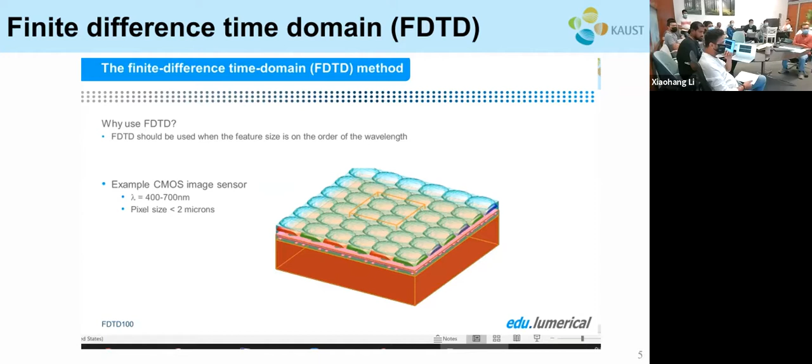FDTD is typically used when the feature size is on the order of the wavelength. This wavelength scale regime, where diffraction, interference, coherence, and other similar effects play a critical role, is called wave optics. When the feature sizes are much larger than the wavelength, other methods, such as ray tracing, are more efficient.

A simple example where we can see the difference between wave optics and ray tracing is this triangular pattern etched in a material with a refractive index of 1.5. This type of structure is commonly used as an efficient reflective coating because light is always incident at 45 degrees to the normal, which is above the critical angle for total internal reflection, and therefore we expect the device to reflect 100% of the incident light.

We can run an FDTD simulation to see what happens for two different wavelengths. In the first, the incident wavelength is 400 nanometers, or 0.4 microns, while the structure is 20 microns in pitch, or period. Since the structure is much larger than the wavelength, we typically would simulate with ray tracing. As we run the FDTD simulation, we can see the result we expect from the ray optics analysis. This is a major advantage of FDTD: we can chase the movement of the wave. Almost all of the light is reflected.

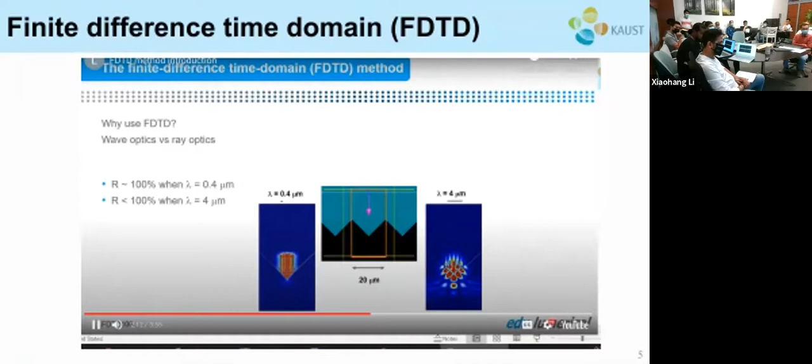The second wavelength we will use is 4 microns, and the structure has the same 20 micron pitch. Now we can see completely different behavior because there is clearly a substantial transmission, and we can even see the penetration of the evanescent field into the air. To correctly solve the second wavelength, we need a method like FDTD.

FDTD is a general and versatile technique that can deal with many types of problems. It can handle arbitrarily complex geometries and makes no assumptions about, for example, the direction of light propagation. It has no approximations other than the finite size mesh and finite size time step. Therefore, it is very accurate. As a time domain method, one simulation can give broadband results. Finally, the FDTD algorithm scales well with parallelization, so it is well suited to modern multi-core and multi-processor computers, as well as high-performance computing HPC clusters.

Because FDTD is so versatile, it can address a wide range of applications. These include photonic crystals, plasmonics, CMOS image sensors, nanoparticle scattering and absorption, nanopattern solar cells, OLEDs and LEDs, gratings, lithography, metamaterials, and integrated optics, to name just a few. You will notice that all of these applications involve wavelength-scale structures.

At the beginning of the simulation, the E and H fields are typically 0. From here we update E at time n plus 1/2, which is a function of E at the previous time step, plus a term proportional to the curl of H at time step n. Once we have the E field updated to time n plus 1/2, we can proceed to update H at time n plus 1, which is a function of H at the previous time step, and the curl of E taken at time step n plus 1/2.

In this way, we can leapfrog the update of E, then H, then E, and so on until we choose to stop the simulation. It is important to understand that we do not ever calculate E and H at the same point in time. They are offset by 1/2 time step. In fact, if you record the E field as a function of time with a monitor and plot it, the monitor will interpolate the original FDTD E fields to the same time step as H, so you may never notice this offset.

Despite this issue, this leapfrog approach has the advantage of allowing us to obtain second-order accuracy in time, which means that the error between the electromagnetic fields calculated by FDTD and the correct solution scales with the time step squared. This means, for example, that if we reduce the time step by a factor of 2, our error diminishes by a factor of 4.

The simulation geometry is discretized into Yee cells, which, as mentioned previously, are the fundamental unit of the FDTD method. The E and H field components are all located at different positions within the Yee cell. This allows us to calculate spatial derivatives by finite differences at the optimal spatial locations and gives us second-order accuracy in space on a uniform mesh. Still, it is important to understand that the E and H components are never known at the same spatial location, which can have consequences for many types of results which we may wish to calculate, such as energy density.

By default, monitors that record these fields will automatically interpolate all field components to the corner of the Yee cell so that you can visualize and analyze your results at the same spatial location. However, this interpolation can be disabled, and this is useful for some advanced calculations, such as determining the optical absorption in a metal near a metal dielectric interface.

In addition to E and H, we must also discretize the electric permittivity, epsilon. In most regions, this is very straightforward because we can assign a permittivity of either material A or material B. However, it gets much more complicated near interfaces because the interface can pass through a Yee cell at any position and orientation, and furthermore, each electric field component is in a different spatial location. As a result, we need a different value for the X, Y, and Z components of the permittivity, even if all materials are isotropic.

This is a key factor that determines the accuracy of the FDTD simulation. As a coarse rule of thumb, you can get initial FDTD results with 6 points per wavelength, and many results such as transmission and reflection will be within 10 or 20% of the correct answer.

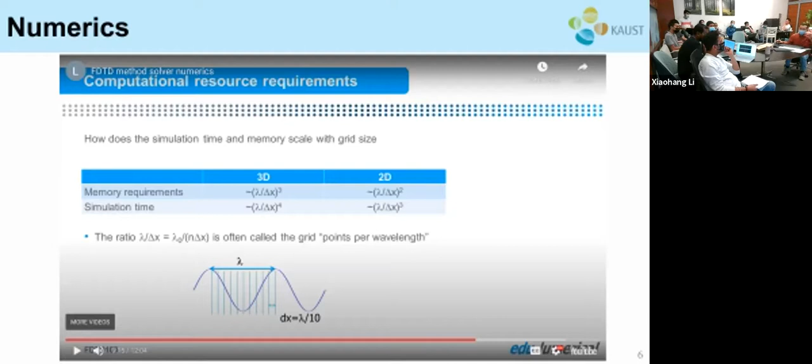Does it mean the simulation time and memory requirement only depend on spatial grid size? Yeah, exactly. Depends on how many grids you have. The more you have... In the space only? Huh? In space only, meaning not time. Also in time. You can define the time step size as well, but usually that's dependent on the speed. Once you discretize the space, the time step is dependent on the speed of light, so it's fixed. So the only independent variable is delta x. Yeah.

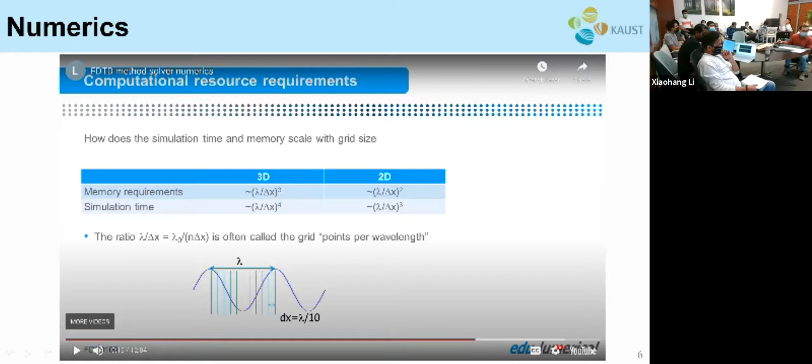Here this value is very important. It's like an empirical value to get good first results: the spatial grid size, dx, equals lambda divided by 10. This is like a rule of thumb when you want to do a calculation. The minimum grid size should be this value.

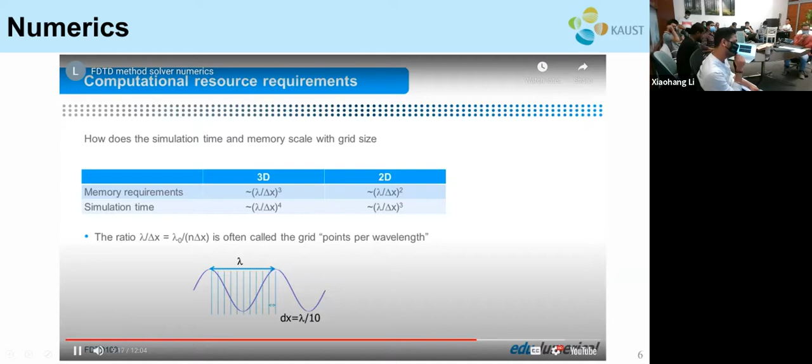With 10 points per wavelength, many results will be within 1 to 2% of the correct result, and it is rare to require more than 20 points per wavelength. I should note that this is a rule of thumb only, and sometimes much smaller meshes are required to resolve geometric features or to correctly simulate plasmonic effects where high light confinement can occur.

It is also important to note that the points per wavelength should be defined with respect to the wavelength in the medium and not the free space wavelength. Therefore, for similar accuracy, a smaller grid size should be used in materials with higher refractive index.

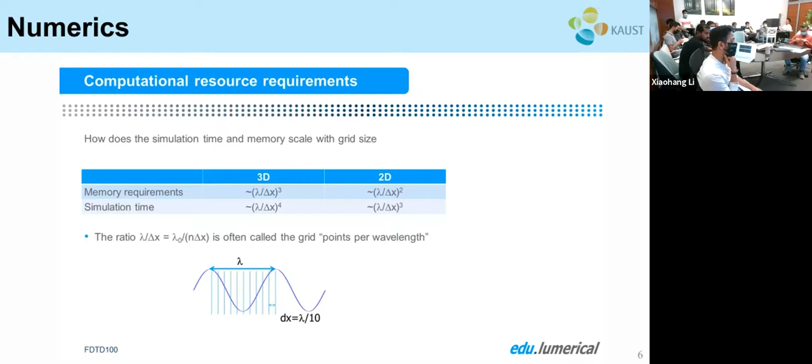Lumerical's FDTD solutions provides a simple mesh accuracy setting that targets a minimum points per wavelength in all regions of the simulation and automatically adapts to the refractive index of the different materials. The mesh accuracy of 1 through 8 corresponds to points per wavelength targets of 6, 10, 14, 18, and so on up to 34. The default value is 2, and this is appropriate for most simulations.

Initially, you may want to even use a setting of 1 until everything else is set up properly. It is rarely useful to use values larger than 3 or 4, as there is typically something else that limits the accuracy of the simulation at that point.

For fine geometric structures, or situations such as plasmonic structures where you know the light confinement will be high, the mesh can be controlled locally using mesh override regions.

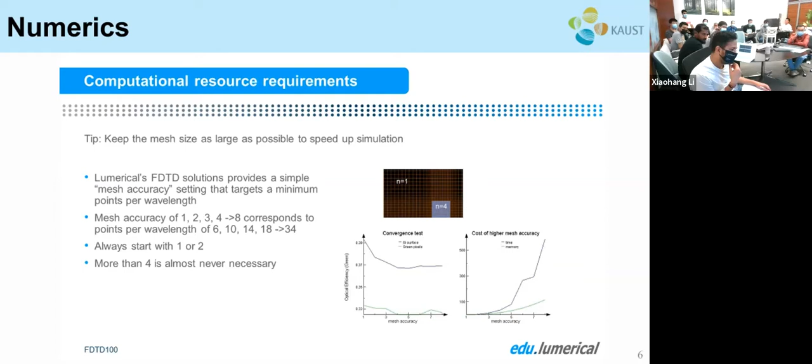In the second figure, you can see the cost in time and memory of the higher mesh accuracy settings, normalized to a mesh accuracy setting of 1. It takes almost 600 times longer to run with a mesh accuracy setting of 8 compared to 1. In this application, where a mesh accuracy setting of 1 can run on a single workstation in a minute or less, this can be the difference between waiting 1 minute and waiting 10 hours for your simulation to complete. Yet the results are almost identical.

Clearly, you want to be working where each simulation takes only 1 minute, which makes it easy to perform complex parameter sweeps and optimization.

Okay, this is the introduction on some of the numerical schemes used in the software. Go to the next page.

Next is an introductory video on the software we are going to use. It's called Lumerical FDTD. It's a very short video that introduces some of the main features of the software.

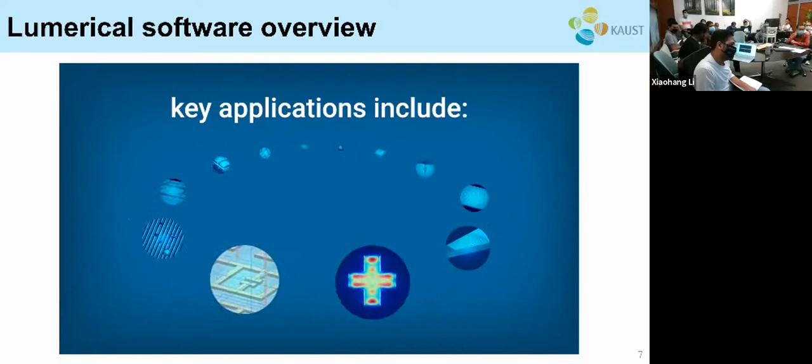LEDs and photodetectors are a main topic in our group, so this software can be used for that as well.

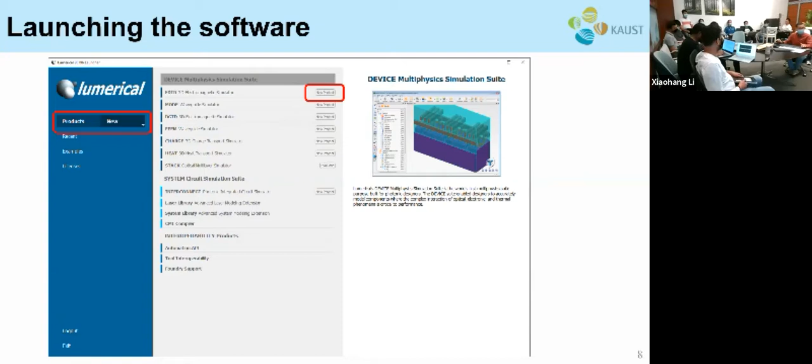Okay, so those are all the background knowledge I want to cover. Next, let's take a look at the software. I think all of you already have the software installed, right? Yeah, okay, so let's open it.

Share screen. So this is the software on my computer. I think it might look a little bit different on yours because the one you installed is a much later version. Mine is the 2019 version, I think yours is the 2021 version.

Can you close the top bar? Might be floating. Originally the company was called Lumerical, but it has been acquired by ANSYS, I think last year. That's why now the software is called ANSYS FDTD, or something.

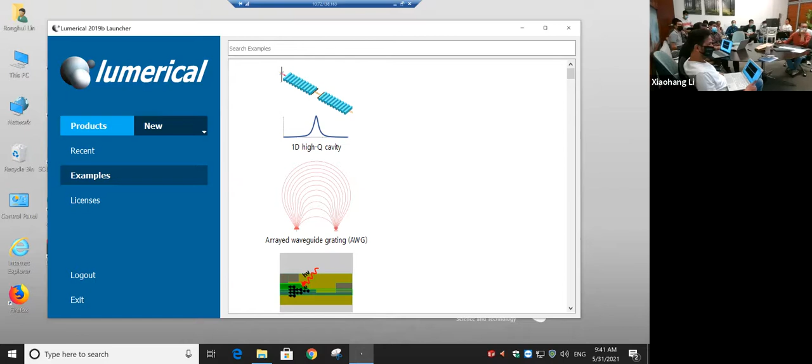We double click to launch the application. On my software, this is what it looks like. I think it looks a little bit different on your computer, but the main idea is the same. I go to the products bar, the menu bar on top, the first one, products. Then at the top there's an entry called FDTD 3D electromagnetic simulator. Here I click on new project, and the FDTD will be launched.

Ours are totally different, yeah, we don't see any of this, like the product inside the solver. Inside the solver, yeah. Oh, that means if you see a screen asking you... it's the third option, right, for Jose? Yeah, if you see that, Jose, can you sit next to Ronghui so that he knows what the latest interface looks like.

I think you have to activate the license on a model and restart the system. I think so, yes. Okay, so request an evaluation? Yeah, and this is the initialization, log in. If you are on the screen asking you to input a license, go to the third option to request a trial license.

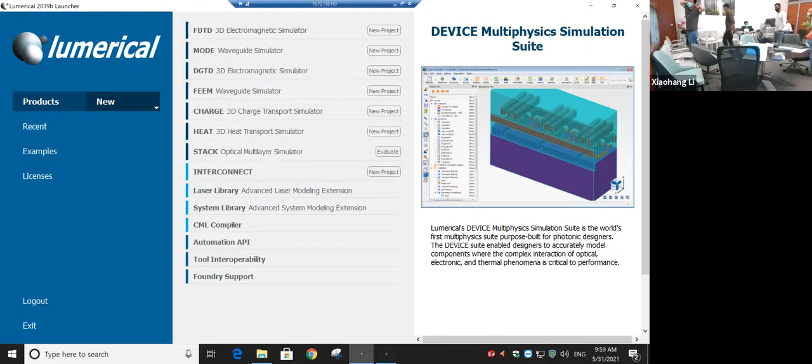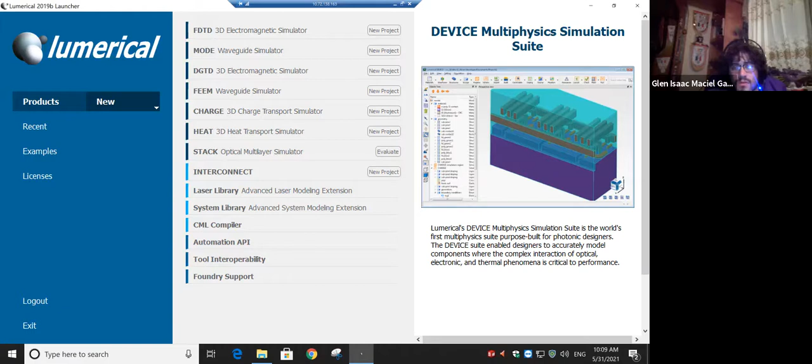He used to wait. But Glen, if I remember, they just sent an email recently that the United States is not banned anymore. Yeah, the US is not banned anymore. So like I said, you can go to the US, take the Johnson & Johnson vaccine, just one shot, and come to Saudi Arabia, no quarantine. Okay, I'll check that. Yeah, I mean, the US was on the list. Now the US and UAE are not on the list. Oh, okay. So you go to the US, take the Johnson & Johnson, just one shot. After that, you come to Saudi Arabia, and you just have to stay at home for a few days. That's it. You don't have to go to the hotel. Okay, let's continue. Glen has no problem with this software.

So now that everybody has installed the software, we can go on and take a look at it. At this main launcher, we go to the top menu, Products, and then here, FDTD 3D electromagnetic simulator. We open a new project. This is how the interface looks. Is everybody on the same interface? Yeah. Okay. So this is the main interface. We can adjust the window size a little bit.

The four black windows is the main graphics window. All your structures, all your monitors, your whole simulation area is displayed in these 4 windows. We can see here the XY view, XZ view, the perspective view and the YZ view. These are your simulation area viewed from different perspectives. Here on top are the standard Windows menus. We have File, Edit, and some other menus for global settings of the software, such as the default layout, the default units, and other things.

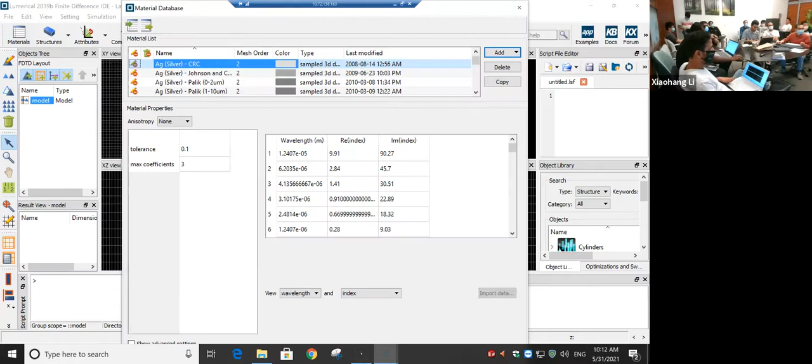Below that, we have a lot of icons. The first one is the materials. This is where you define your simulation material, such as silicon or gold or any other user-defined material. You can click on it, and it will open this material database window. Here we can see a lot of built-in materials. It's sorted in alphabetical order. It starts with silver because it's Ag, and goes all the way to W, tungsten. As the simulation goes on, we can select materials from this menu. We will close it for now.

The second icon is the structures. If you click on the main icon, it will directly create this rectangle. But if you click on this inverted triangle, we can see many more structures: triangle, rectangle, polygon, circle, all kinds of different shapes. This is where you define the shape of your structures. For example, if you want to simulate a rectangular LED, the first thing you need to do is create a rectangle. The third icon is called attributes. This is used for some more advanced transformations. To be honest, I never use it.

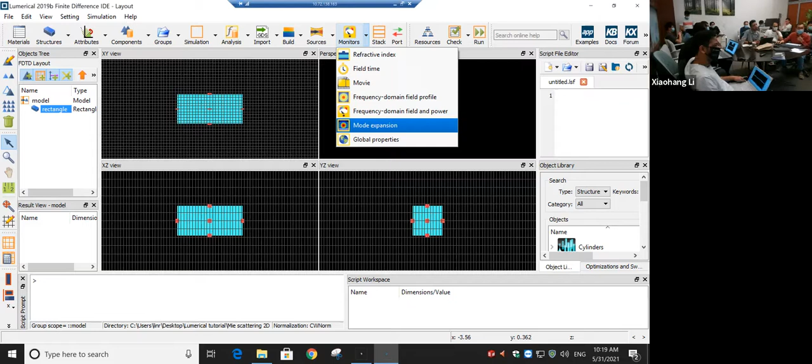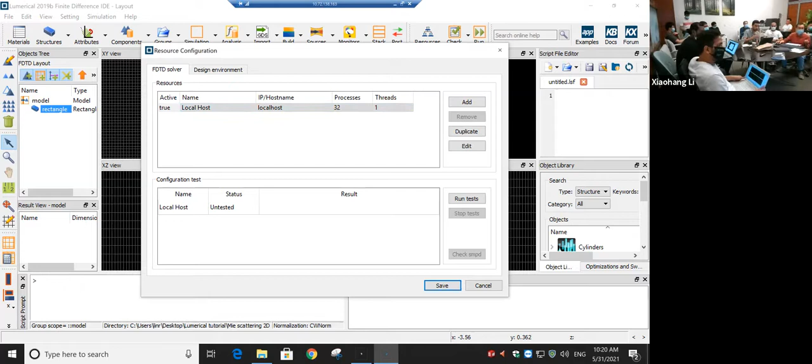Finally, this global properties is used to define the global properties of these monitors. These four, 1, 2, 3, 4, we don't use so often, so I will skip. They are not that important as well. Among them, this resources is used to check how many simulation servers you have. It's mostly useful for when you have a cluster.

Finally, the check. This can be very handy sometimes. If you go to the second option, you can check the simulation and memory requirements. If you have a very big model and you are not sure whether your computer can handle it, you can check using this function first. Finally, this is the Run menu. You click it and the simulation starts to run. So this is the main toolbar. This toolbar is the most important. All our simulation will be defined by using this toolbar.

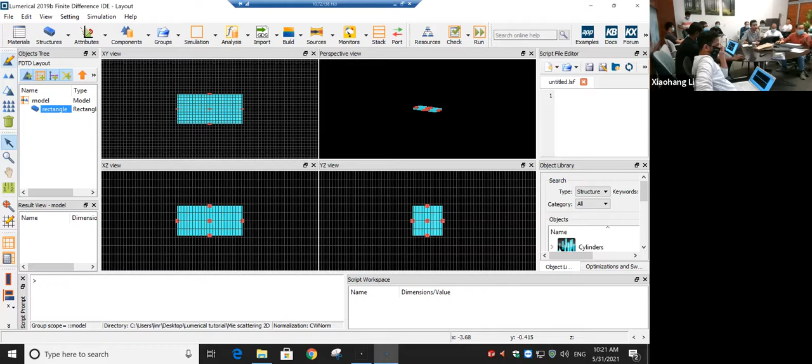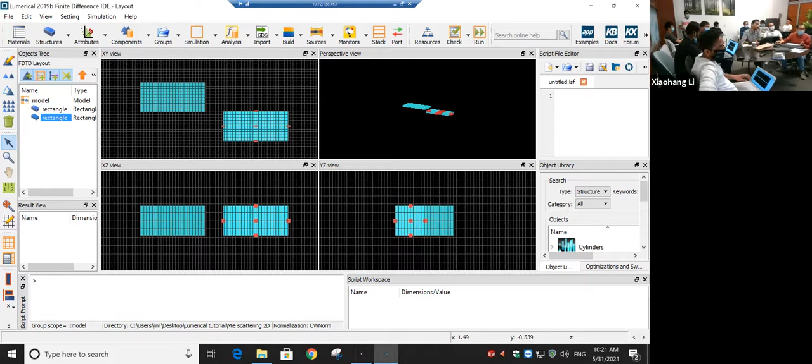And then here on the left-hand side, we have a few tools for editing and for viewing. For example, this one is to duplicate a structure. We already have a rectangle here. We click this duplicate. Now it becomes two rectangles. See? Here there are also move, array, and delete. We can also delete this one. These are some viewing options. In particular, this magnifying icon is very handy sometimes. When you click it, the selected object is zoomed in.

Next, I want to introduce the operations of this viewing window. First, let's create a structure here. I already did this one. We go to structures and click circle maybe. Then a circle is created on the main window, right? The middle mouse wheel is used for zoom in and out. Or we can move the object. Click it and just grab it.

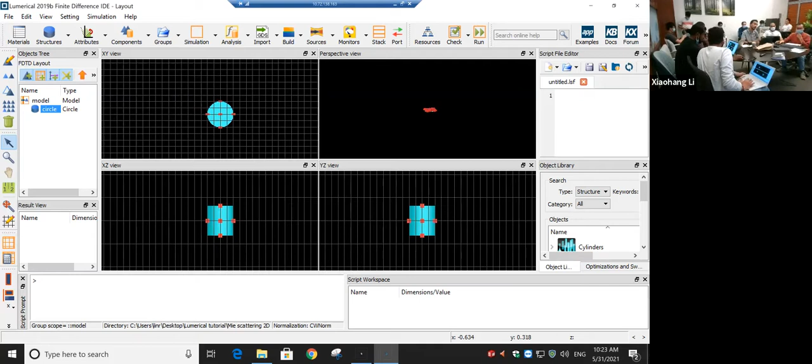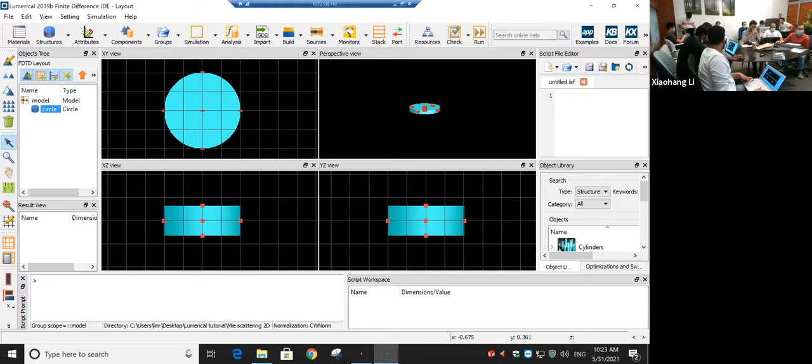Sometimes if you zoom out too much, your structure totally disappears. Here is when this icon comes in very handy: zoom extent. You click the zoom extent, and everything is back to normal. So this is what I want to share.

Next, this area is very important. It's called the object tree. In this object tree, all our models are defined. For example, if you have a source, a monitor, or a structure, they will all be displayed in this area. It's our main working area.

On the right-hand side, we can see the script file editor. This is where you write the scripts. You can write computer scripts and run them for automation purposes. For example, if you want to build a thousand cylinders, this is very helpful. You cannot do them one by one; you have to use a scripting language. This is where we can do it.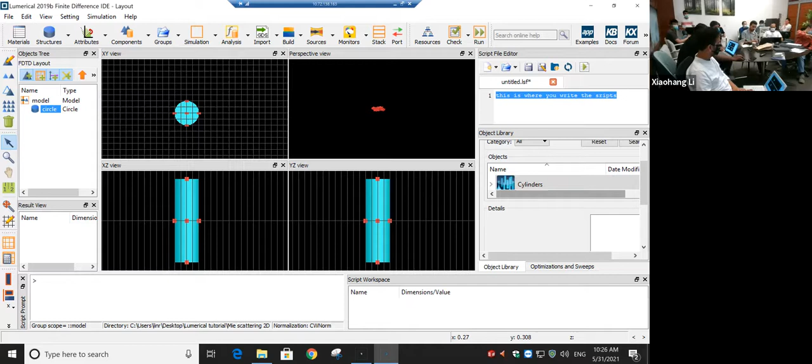So here in the object library, there are many pre-built objects, including complicated geometrical shapes. If your interface looks a little different from mine, you can go to View, Set Default Layout, and choose default layout. Then everything will look exactly the same. If that doesn't work, go to View, Windows, and open everything.

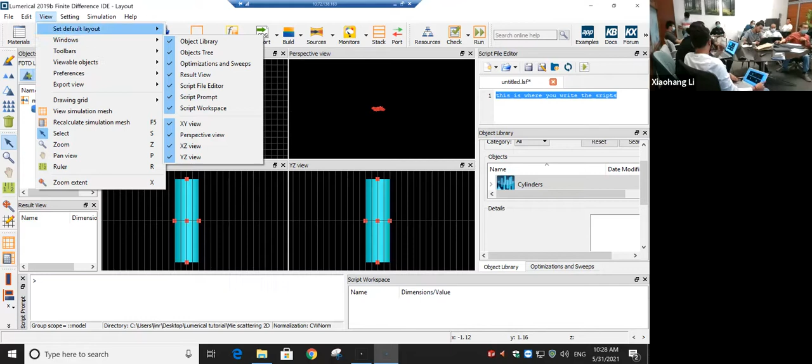Right side. Do your own hands-on. If you have any questions, just ask Ronghui. He will only do this one time in his life, so no second chance. Well, my office became a supercomputer with so many CPUs running. Let me check. Oh my God. Maybe restart. Now you have it.

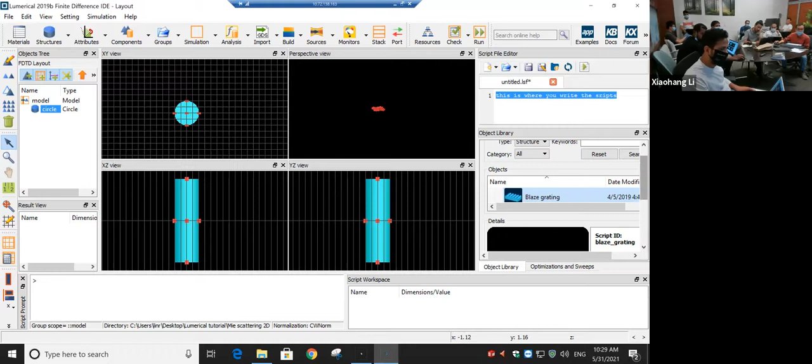Set default layout usually brings us to this window. So we were talking about the object library on the right-hand side. There are a lot of pre-built objects; we will come to that later. You can select any one of them. For example, if I want to build a grating, select it, then scroll down and there's an insert menu where you can insert it.

But again, it's a little bit out of proportion. We can click this zoom button to make it in proportion. This is a very useful tool. We will come to that later. So this is the interface introduction.

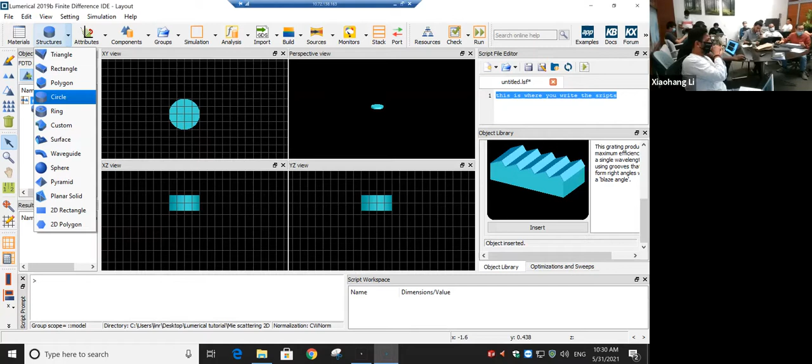Anybody having any problem? If the object we want is not available in the library, how can I make a new one? It's a very rich library actually; you can create almost all shapes. I think we can take different dimensions and merge them. If it's not available, you can always write code to divide your geometry into pixels. For each pixel you add a rectangle, and all the rectangles can form any shape you want. That's usually what I do. So we have to define those pixels through a program.

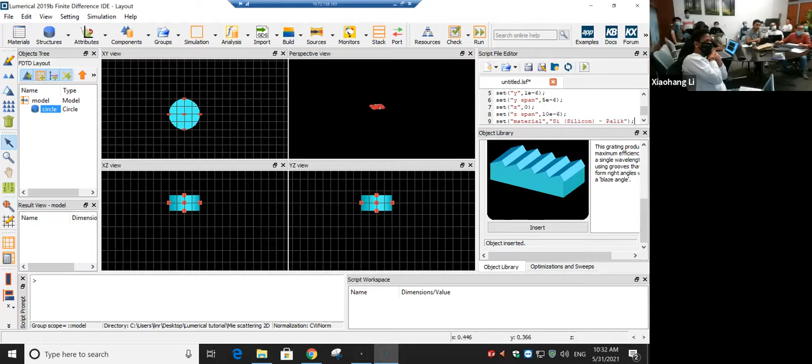How do you write a script to create these, like you talked about earlier? Can you write one script so we have a reference? I can show you how. It's a function. You can use this code here. Here I delete it first. Oh, I haven't saved the file yet.

Again, click this zoom. Now the geometry is created. I use this script. It's very powerful if you want to add 1,000. Oh, I see. It's like C, you can create a loop. Okay. Different locations. Maybe times, maybe plus. Then it will create an array of rectangles shifted in the x direction.

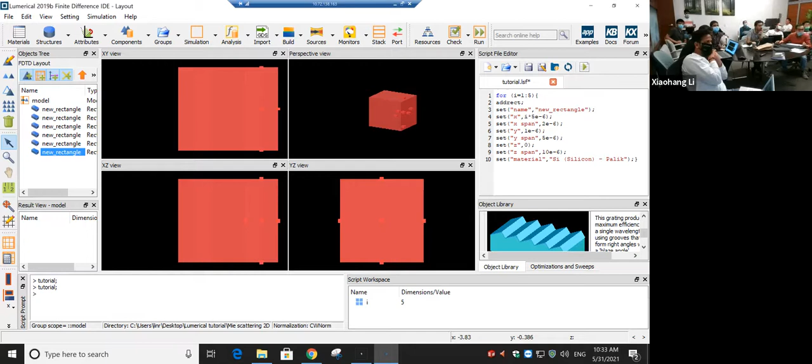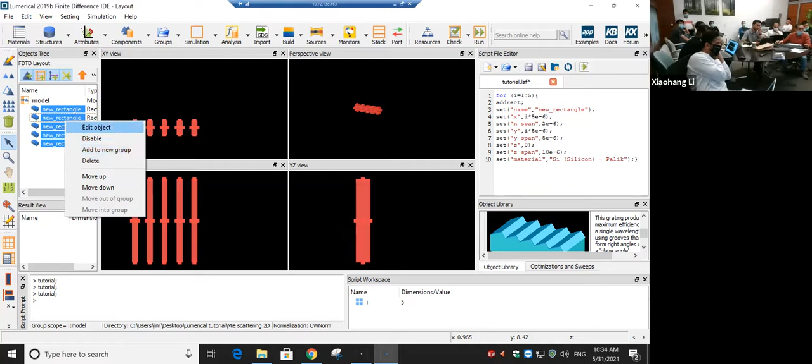Here, the object tree has all the geometries, all the monitors, all the sources you have defined. You can choose them. You can select them first with your left mouse button, and then right click. Then you can do all kinds of operations. Delete.

Now it's going in another direction. For example, if you want a complicated shape, you can use these rectangles to build them. Oh, like a sort of assemble. Okay, it's going X and then Y. Yeah, it's just a simple demonstration. You have to just play with this stuff. Sure.

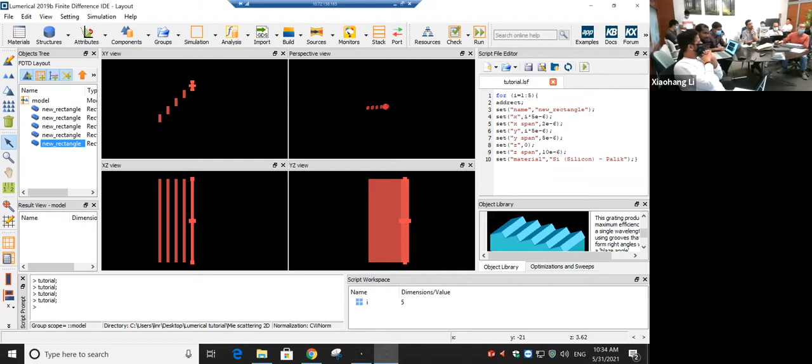Any more questions? This is a more advanced function, just a demonstration. In order to run the scripts, you need to put more effort. Multiple structures have their own commands.

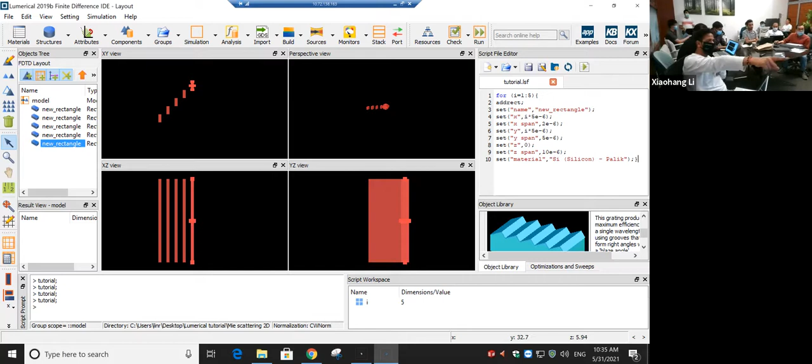If you want to name a new set, the new rectangle name is circle. We can also add circle. If you add the circle, the name will be saved as new rectangle because we didn't change the name. Oh, there's a mistake. Because circles are not defined by the x and y dimension, they should be defined by the radius. So for add circle, we need another set of commands.

It's like MATLAB. You have to go and check the commands. Do we have all these command directories in the software instead of going to the internet? I don't think so, but here are the documents. Maybe you can check here. There's no manual for this software, but there's a large number of documents and websites you can browse. Sure.

So these are more advanced functions. I will not cover it today. In order to learn the scripting language, you need to put much more effort and use it from time to time. So this is the interface. Next, we are going to use this program to solve a specific problem. It's called the Mie scattering problem.

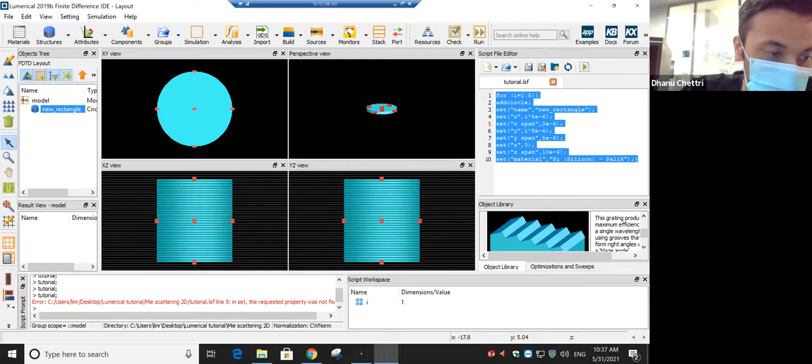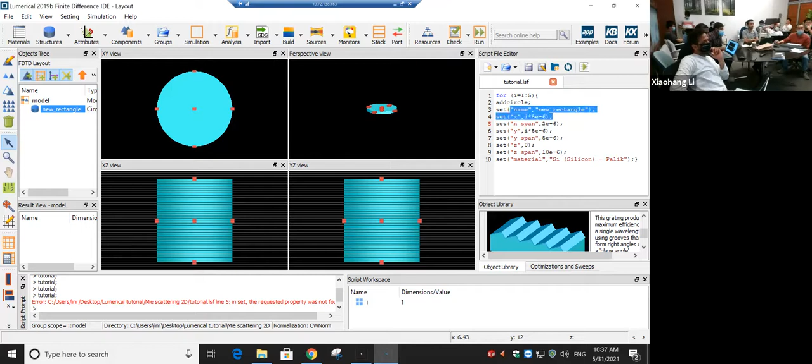Excuse me, what is the unit of this? For example, it says radius equal to 5e-6. The default unit is meter. You can change the default from here, but it's in microns. In scripting, the unit is always meter. Here, the setting is only for the graphical user interface.

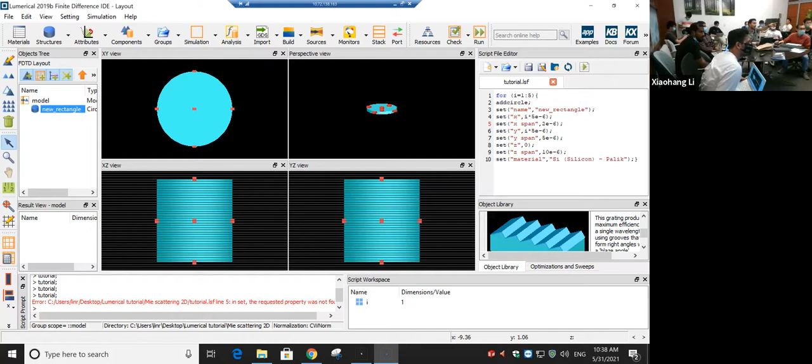Actually, if you create a structure, and then you click on it, it will show you the units for the size. Click on the structure and right click on the object properties, edit object. It says micron. Yes, it's in microns. So we can also reconfirm it. Any more questions? If no, then let's look at a specific problem.

Let me share my screen. Should we open the one you sent us? No need. Let's go through some background knowledge first. That one is an already made model. We are going to start from scratch. Thank you for preparing the background knowledge. So this is the problem that we are going to tackle today.

We have a dielectric cylinder, and an incoming wave impinges on the cylinder, and the problem is, what's the distribution of the scattered field? Obviously, when this incoming wave impinges on the cylinder, it will be scattered in all directions. What we are interested in is the intensity of the scattered field at each direction.

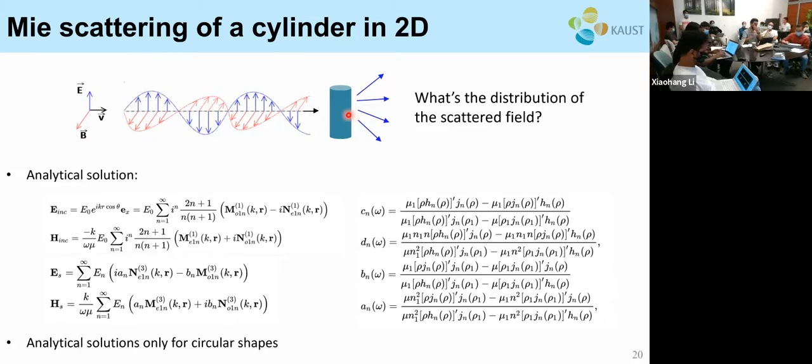In Ronghui's research, most of his structures have a size comparable to the wavelength. Which wavelength are you using? Visible and UV, so a few hundred nanometers. He never deals with structures that have 10 micrometers — most of the structures he's dealt with are a few hundred nanometers. That's why he used FDTD. So FDTD does not work in every single scenario; it only works when they're comparable in size. Also, the beauty of nanostructures is that they interact with light more strongly than those big structures.

So let's go back to the main topic. We will work in 2D and launch a plane wave towards the structure, using FDTD to propagate the field so that the scattered field and the direct transmission can be calculated. This scattered field actually equals the total field minus the direct transmission. For that purpose, we have a special kind of source to do that — it's called the total field scattered field source, or TFSF source.

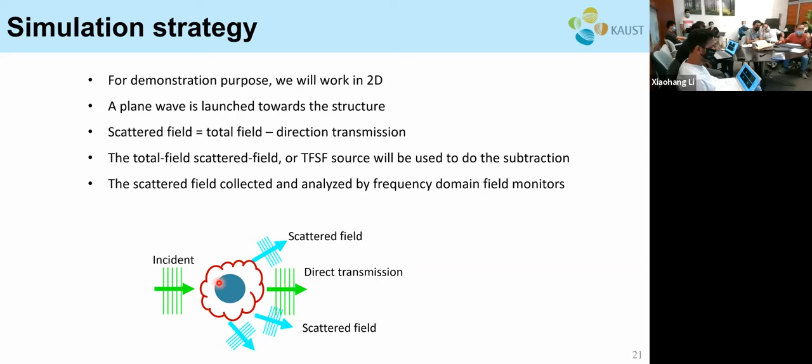As the name suggests, this is a special source used specifically to deal with this kind of problem. It can calculate the scattered field of nanostructures. What's the difference from a plane wave source? The plane wave source just launches a plane wave toward the structure and doesn't care what happens next. But this source can subtract the direct transmission for you, so what you get is only the scattered field. Here I have a video to explain this TFSF source in detail.

The total field scattered field, or TFSF source, injects a plane wave with finite span and separates the computation region into two regions. Inside the source region, both incident and scattered fields are present. We can see in this cartoon there's an area defined here. Outside of that area is a purely scattered field, but inside this area is a mixture — it's more clear here: inside this area is the incident field plus the scattered field, which is much stronger. But outside this field, we can see there's a discontinuity at the interface.

So outside this boundary is the scattered field. Where does this flux come from? It's part of the source. We need to define the size of this box, and outside it, only scattered fields are present.

The total field scattered field source works by subtracting, at its boundaries, any light which is directly transmitted through the source region or reflected from a flat substrate, so that only light scattered by a feature contained completely inside the source region will pass through the boundaries and propagate outside to the scattered field region. To get a better idea of how the source works, consider what happens in the simple case when the source is injected in free space with no scattering objects, as shown in this movie. The plane wave is injected from one side of the source region and subtracted at the other side. Since there is no scattering, the fields are zero outside of the source boundaries.

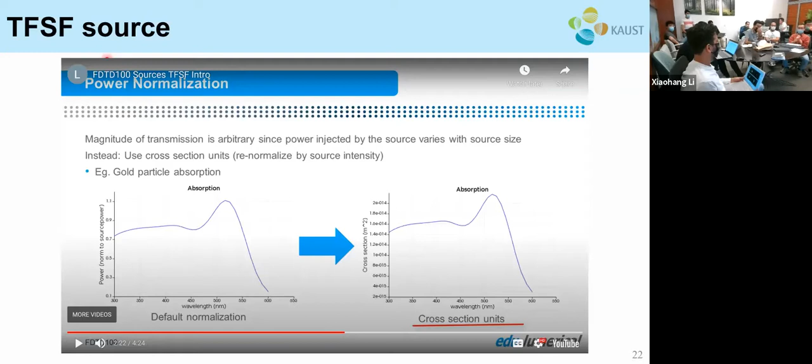Most of you have heard of the scattering cross-section and absorption cross-section. It's the total scattered or absorbed power normalized by the size of the particle. Cross section units are usually used in Mie scattering simulations to get the absorption, scattering, and extinction cross-sections. There's a discussion about the different possible normalization methods when using the total field scattered field source, linked below.

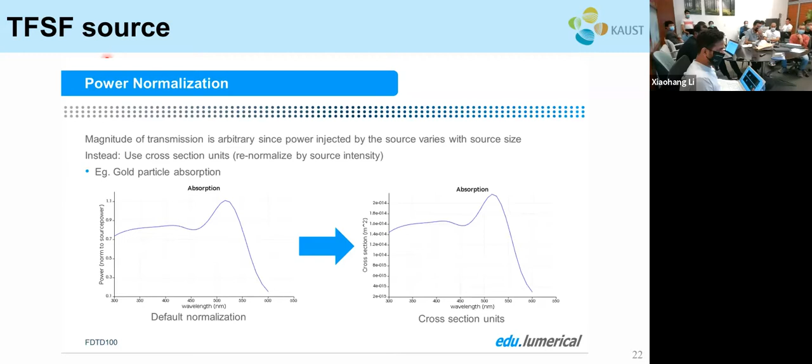The total field scattered field source works with absorbing materials and anisotropic materials, and it works with multi-layered substrates. It can also be used to simulate standalone scattering objects or periodic structures in conjunction with periodic or Bloch periodic boundary conditions. Here are some examples to illustrate some of the rules for setting up total field scattered field sources.

If using PML boundaries at the sides to simulate a single standalone scatterer, the source should not extend into the PML boundaries at the sides. If simulating a periodic structure, the source can extend through periodic boundaries.

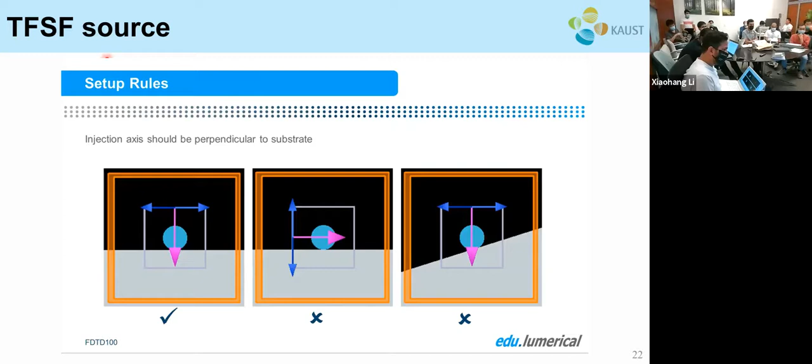If there is a substrate, the source injection axis should be perpendicular to the substrate. If there is a substrate, the edges of the source should intersect with the substrate. The source should not intersect with the scattering object.

The total field scattered field source is useful when you want to be able to separate the scattered fields from the total fields and perform analysis on the scattered fields only, such as getting the scattering cross-section or the angular distribution of scattered light in the far field. In the next unit, we'll set up a total field scattered field source to measure the scattered fields from a particle which represents a defect on a structure.

Okay, so that's some basic knowledge about this source we'll be using. Next, let's do the hands-on practice.

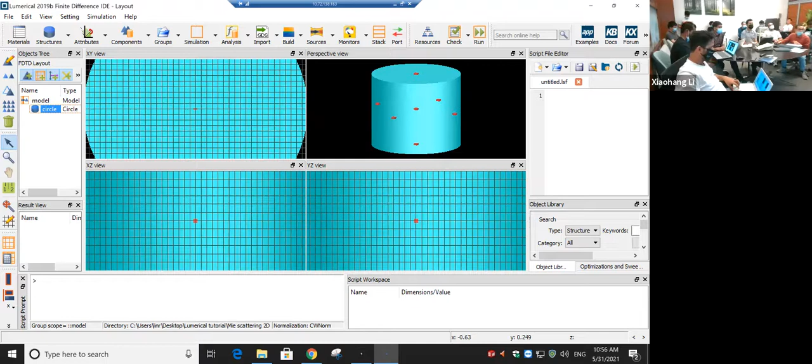We can notice that it becomes very large. Then we can click this magnifying icon to zoom it, and now the display is normal.

After this circle has been defined, we will next define our simulation region. So we need a box to tell the software which part is our simulation area. So here we go to simulation, click this inverted triangle and select region.

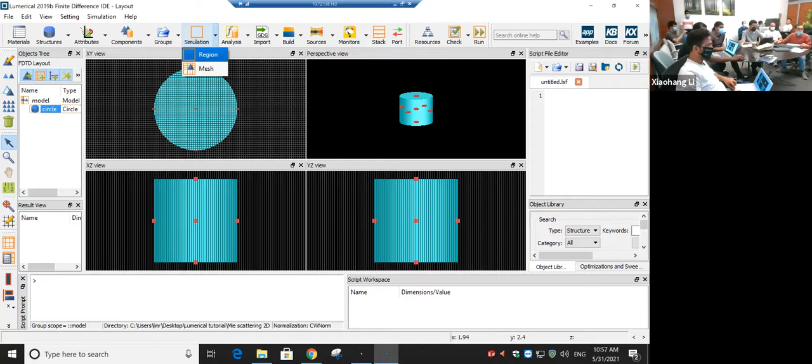After we do that, we can see a yellow box appear on the screen. Then we go to this objects tree, right click, edit object. Same, we need to do some settings.

The first thing we need to do is on the general tab, set this dimension to 2D. Then... yes, it's slightly different. Oh yes, it has the same background and axis. We do have the same, but it's arranged in a different way. Anyway, here we only need to change the dimension to 2D.

Next we go to the geometry tab. This will define the size of the whole simulation area. For that, we set x center 0, x span 7, y center 0, y span 7, z 0, like this. So this will define a 7x7 simulation area.

Remember to set the center to 0. Oh sorry, here I made a mistake. The center should be 0. So it's centered at the origin and would span 7 everywhere, 7 to the x and 7 to the y.

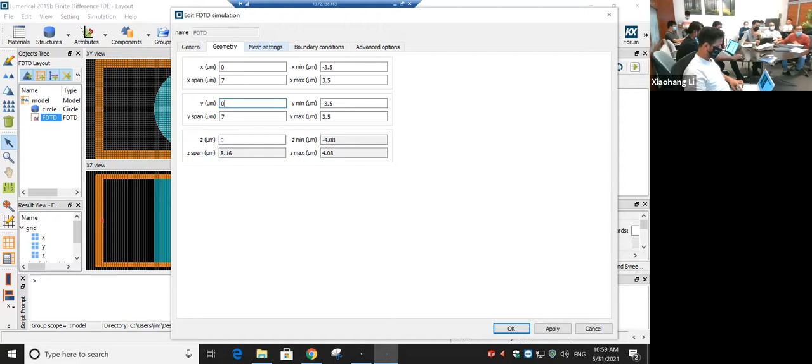Next, we're going to go to this mesh setting. This defines the mesh size, how many mesh. The mesh type, we keep it auto non-uniform. FDTD, Lumerical, has this algorithm to generate automatic meshes. We can use it. So here we only need to set the mesh accuracy.

Let's set it at 5. Why too high? 1 and 2 is the most suggested one, right? Yeah, but the finer the mesh, the higher the accuracy, it will take quite some time. Only a few minutes, right? Yeah, yeah.

Why is the non-uniform mesh used? Automatic is understood, but non-uniform - that's because in this circular area, it has a higher refractive index, so the mesh has to be finer. This program will automatically refine the mesh in this area.

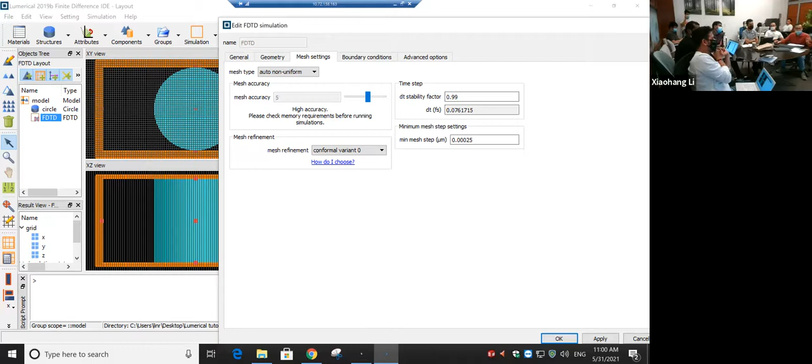So that's the mesh. Then we go to boundary setting - X minimum, X maximum, Y minimum, Y maximum. They are all PML. PML is short for perfectly matched layer absorption. So we keep it as default.

If you use it in the future, you might need to define other boundary conditions, but that's another topic. We can keep it as PML for now. We have defined the boundary, the mesh, size, general. Everything's fine, we can click OK.

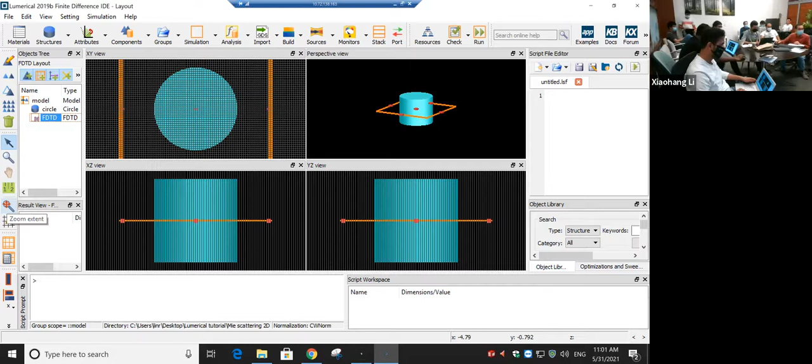Again, we can click this zoom extent to make the display a bit nicer. We have our simulation region, we have our structure. Next thing is to define the source.

Total field, scatter field. Yes, total source, total field, scatter field. Same thing - right click, edit object.

Here there are a few settings we need to do. First, let's give it a name: Source 1. Okay. On the general tab, the injection axis, let's set x-axis. Oh, injection for the light. Yeah. Direction forward, amplitude 1. This all keep as default. The polarization angle we change it to 90. This polarization angle is the angle of the electric field. So we want it to be perpendicular to our simulation plane. So let's set it to 90.

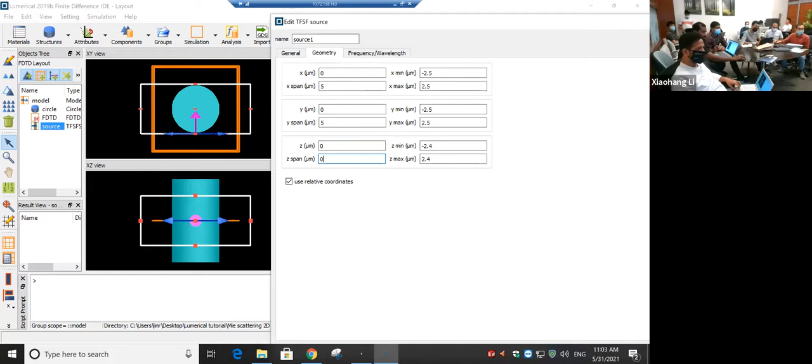So everything's fine. Then let's move to this geometry to define the size. The size: 0, 5, 0, 5, 0, 0. Because we're working in 2D, Z span can be 0. This is the size 5 by 5.

Then let's go to this frequency / wavelength. So this defines the wavelength span we want to simulate. Because for example, if you are only interested in the UV range, you need to launch a source that covers the UV range. If you are interested in infrared, you want a source that covers the infrared. So here's where we set the range.

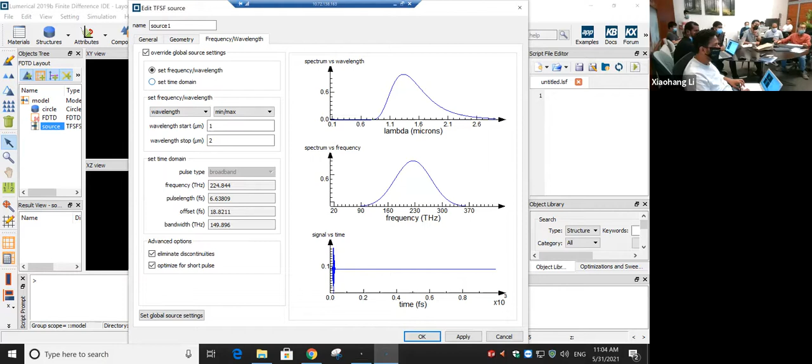Wavelength start, let's put 1 micrometer. Wavelength end, let's put 2 micrometer. So the simulation is from 1 micrometer to 2 micrometer. Also infrared range. Yeah. So everything else we keep the same, default. What's the time domain? Is it a Fourier transform from the wavelength? Yes. But this is automatic. We don't need to set it. It's according to the wavelengths, right? Yes. It's the inverse Fourier transform of the wavelength. Everybody got it? Same page?

Then we click OK. What's the dimension? That's the dimension, the radius we have mentioned. In the circle, you can see that. Now the screen should look something like this. We have this big yellow box. This is our simulation region, and we have this gray box. This is our source. We also have a pink arrow. This indicates the direction of the injection. And finally, we have this circular object.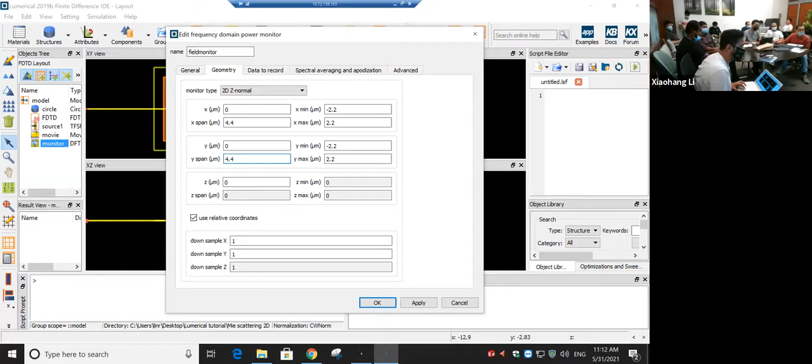Everything else we keep at the default. We just need to set the geometry and the 2D Z normal. It's very easy, very convenient. Also the name, let's give it the new name called field monitor. After this step, we can see there's an extra yellow box within this gray box. So this field monitor will record the total fields, everything, including scattered and the incident field.

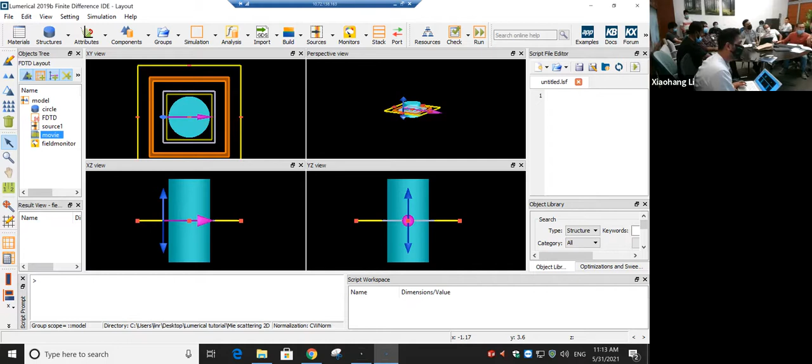The field monitor is inside the source? Yeah, it's inside the source. And you place two monitors, first for the time domain and second for the frequency domain, but the time domain you put outside and the frequency inside. Why? It's just a matter of choice. You can specify the size as any value you want. I want to make a movie of the whole simulation, so I put a very big monitor around our simulation area, and I'm only interested in the field in this area, so I put the field monitor here. You can put this monitor at the area of interest.

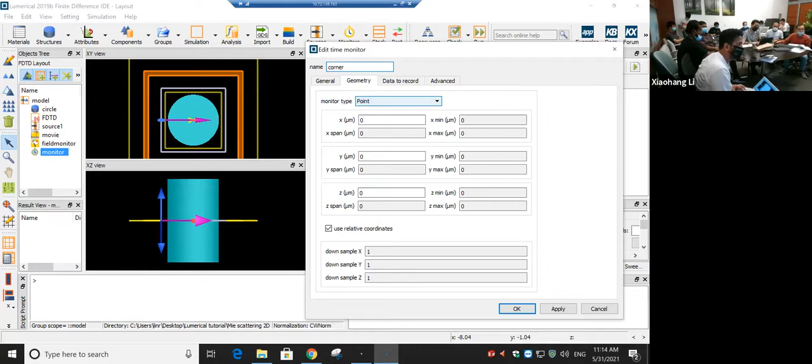Next, I will show how to add a point monitor. All our previous monitors are 2D monitors that monitor a surface. If you want to monitor a point, we can also do that. Go to monitor, this field time, it has this clock icon. Click, then we edit. First, let's give it a name, corner, because we will put it in a corner. General, we leave everything at the default, and in geometry we can see the monitor type is point. Then we just need to specify the location: X 3.5, Y 3.5.

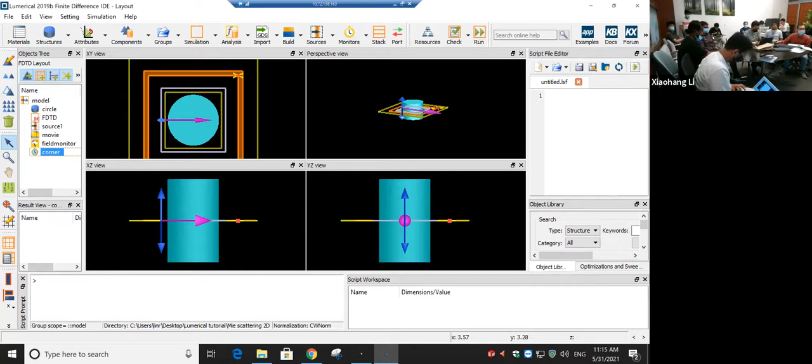After that, we just need to click OK. We can see there's a point at the right-hand corner. This is a point monitor that will record the field evolution at that particular point. So we can define many point monitors as per requirement. For example, when you simulate a plasmonic structure and want to know the enhancement at a local point, you can add a point monitor there and get the field.

The next few steps are very critical because we will define the monitors to simulate the scattering cross section. We go here, analysis. These are pre-built analysis components, which include both the monitors and the code. We can use them directly. So we go to analysis and choose optical power. We can see nothing much happens, but the change is here, in the object library.

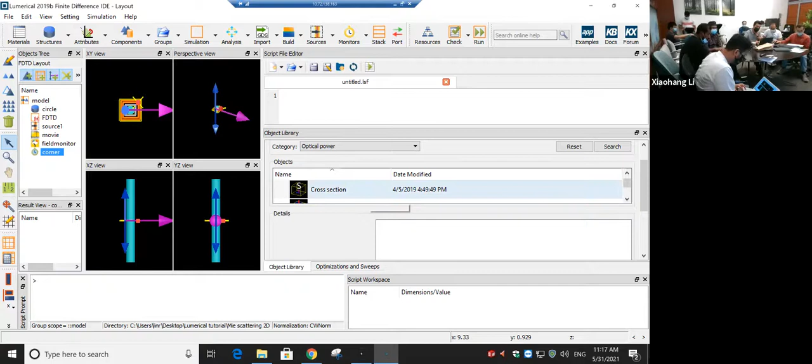You need to adjust the window size a little bit to be able to see it. There's this scroll bar you can use. We want optical power. If you cannot see much, you can drag this window larger and scroll down. Find this cross section, and then insert. It's at the bottom, you need to scroll a little bit. Click insert, and then at the object tree you can see this cross section object. Everybody got it?

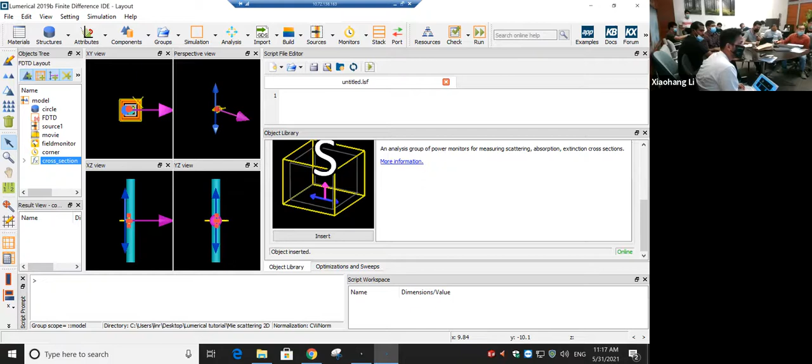So now we minimize this window again, and right click on the cross section, edit. Let's give it a name, total, because it will record the total field. And then this setup variable, the origin 0, 0, 0.